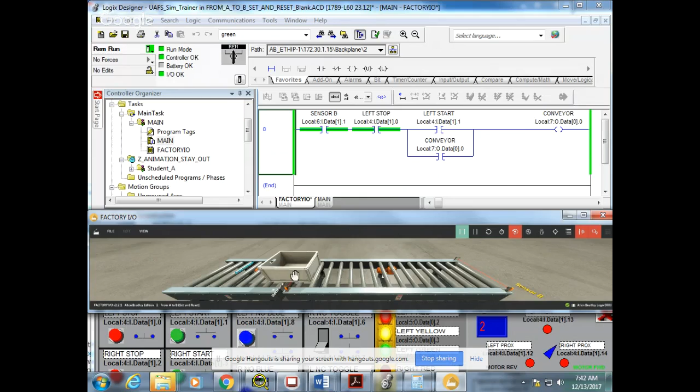So what we're doing here is we are adding an automatic stop to this conveyor. So when I hit the start button, the conveyor runs all the way to the end. Here's sensor B. Okay, so once it hits sensor B, it stops.

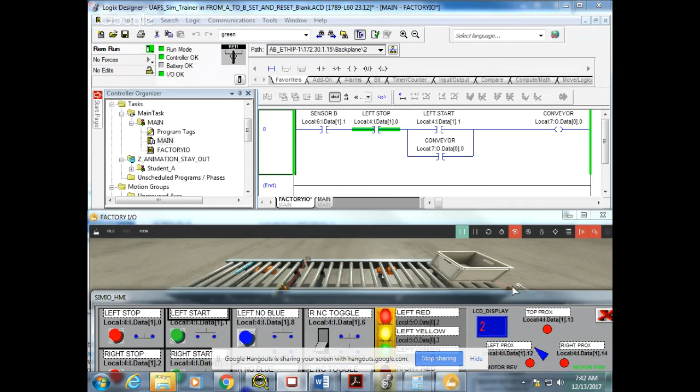So we've got that logic done, and so I've told you that I want you to add an automatic control to this, where you hit a button and it goes into automatic mode, and every time a box makes sensor A, I want it to run to the end of the conveyor and stop when it makes sensor B.

So first thing we need to do is make an internal relay bit to stand in place that we actually hit the start button. So first thing we've got to do is we don't have any control in here. Let's get rid of that sensor. And we're going to make a bit. I'm going to call this auto. And then I'm going to right click and create new. It's going to fill everything in for me.

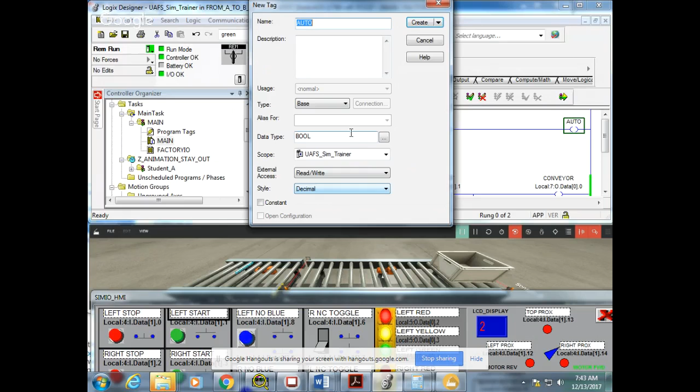But be aware, if you do this a lot, you're going to get kind of spaghetti in your tag table. So it's probably a good idea to make a double integer and pick one bit out of it and use it for everything. But in this instance, we're just making a Boolean bit. We're going to drag that over there, and it took the place. It just says we're in auto. So now we're in auto.

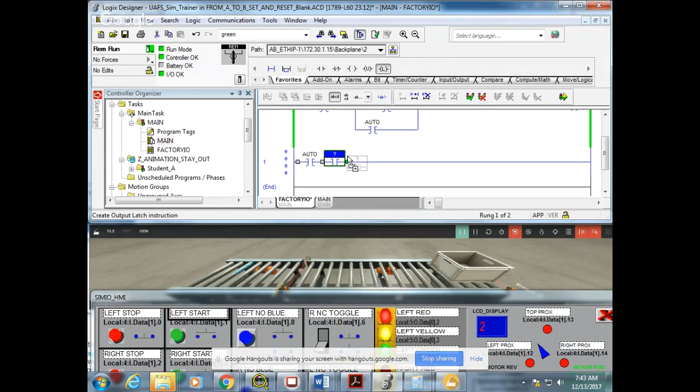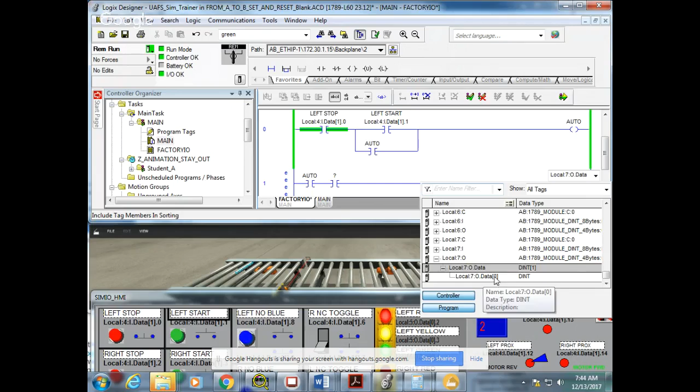Next, I will go over here, and let's go down here. So now I will use that bit that says that I am in auto, and I will use a condition to latch on the conveyor, which is going to be... I'll put data conveyor, and this will be my sensor.

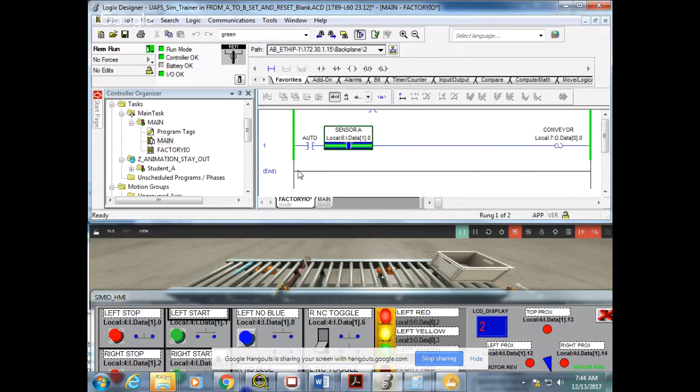A is at the start, right? So now we have A. That gets us started. And so now, when sensor B is made, I will need to program an unlatch bit. So that's your job next: when sensor B is made, go ahead and program an unlatch bit.